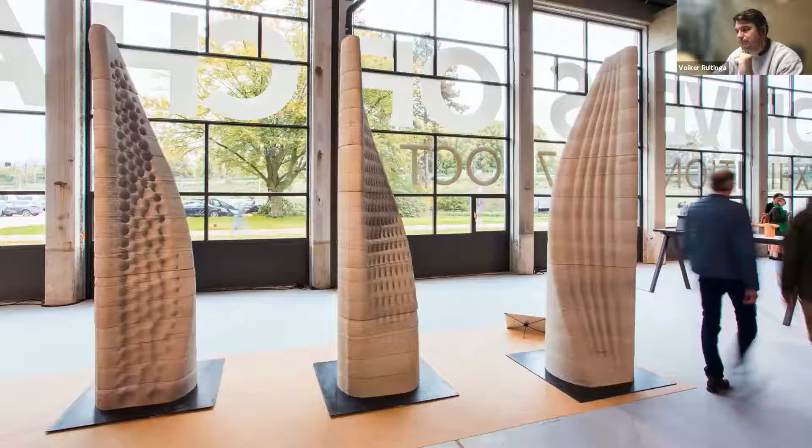But with the new technique, it hardens so fast that much more complex objects are possible. In order to show you what we can do with that, this is the sort of patterns that we can generate with this new technology. And these are all made in one go. You can see the consistency of our material that makes this pattern deviation really pleasing.

So this was a very simple triangular column. Basically every so often you ask the robot to go out 1 centimeter or so. And this one actually does that twice, and then it lays a single layer again, and then repeats the pattern offset a little bit. So it's relatively simple to make in 3D modeling. And if you have a constant supply of material like this, it's really easy to manufacture as well.

So you can see the column. This one we made on a Friday afternoon for fun because we wanted to make a column, see what that would look like. This stands over 2 meters tall, and the print time was just about an hour.

So in relation to what Amy was explaining about plastic printing, one of the key advantages here is just the speed at which we're able to make large objects. So within approximately an hour, we're able to make this column.

Our design philosophy now is what we're good at as a startup is to avoid problems of, for example, the laws we have to adhere to in terms of construction, which obviously don't exist in concrete printing yet. So what we do is we print the formwork, and then we insert rebar and we pour traditional concrete, which calms the nerves of the constructors that have to be involved in these projects, because they can use the mathematics of the existing concrete to calculate what strength these beams have to hold. And we are actually just printing the formwork.

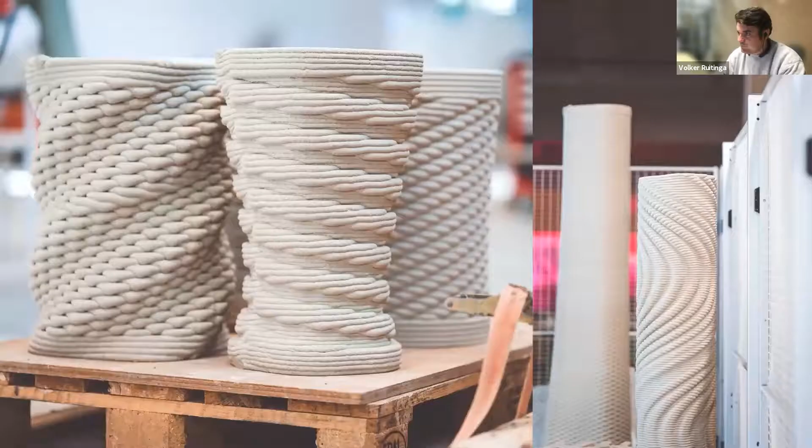In the near future, the compressive strength of our concrete, which is relatively very high because the cement content is very high, can be used as well in the calculations. But for now, we avoid the problem by basically printing the formwork, which has the added benefit of being sustainable in the sense that we don't have to use traditional formwork anymore. And there's a lot of waste in formwork right now. So we avoid that point by making custom objects that are optimized in terms of form and aesthetically very, very pleasing. So that's our focus inside the concrete printing industry as well.

You have the large scale printing of buildings, for example, and then you have the more architectural design type applications. That's what we're focusing on now, because I think that it is making the best use of robots and additive manufacturing and the advantages of form freedom.

So here are some more examples of just simple patterns that we can generate with the same parametric design.

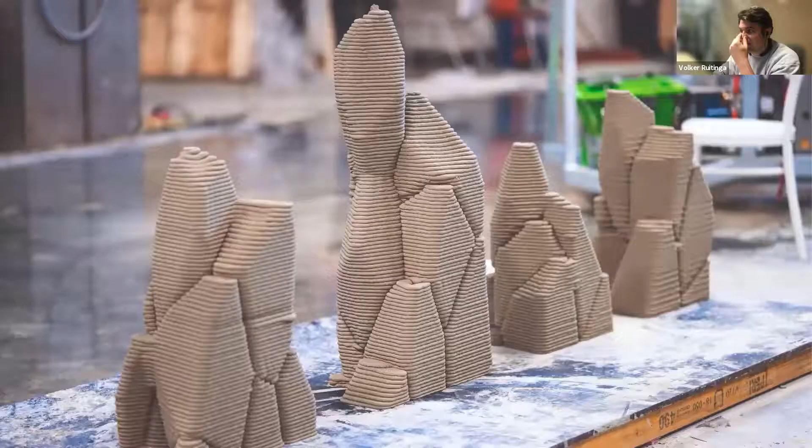Here's a project we're doing with the European Space Agency and the Technical University of Delft, where we are printing objects for on Mars. And this pattern is similar to the wall design I showed you earlier. It's called the Voronoi pattern that optimizes for shape, but also optimizes for heat transfer. And when I first started the project with the European Space Agency for going to Mars, and TU Delft, I thought, I don't want to go to Mars because it's very far away in my mind. But immediately we had lessons learned of this heat distribution that we can do by form optimization.

And we immediately had clients already asking to print electrical boxes for them outside, incorporating this heat distribution techniques for the railway system in the Netherlands. So there's a good cross learning in these type of projects for sure.

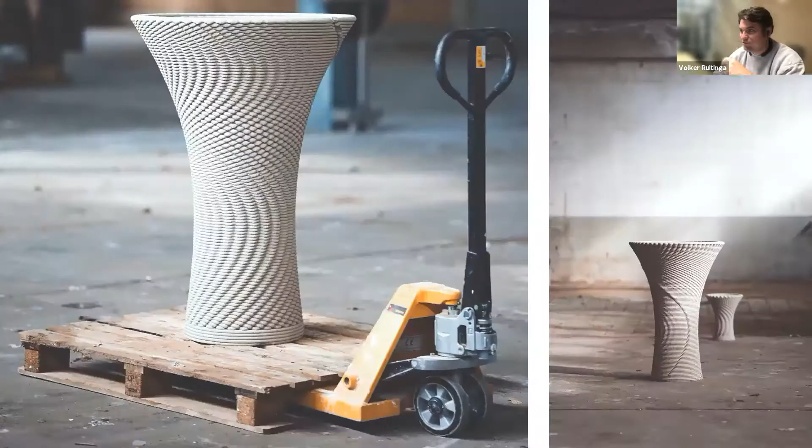I'll leave you with a final show of just the sort of aesthetic detail we can reach. This is a simple pot or bar stool or wall garden element printed in approximately 30 minutes. And you can see a beautiful pattern emerging just from this parametric design.

So to reiterate, what we do is we sell complete hardware systems in concrete printing, including the software, which we sell also. We do printing as a service and provide consultancy in the business as it is now.

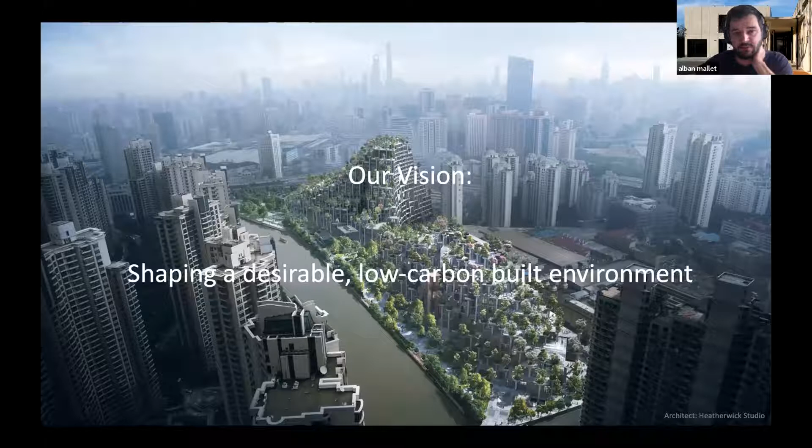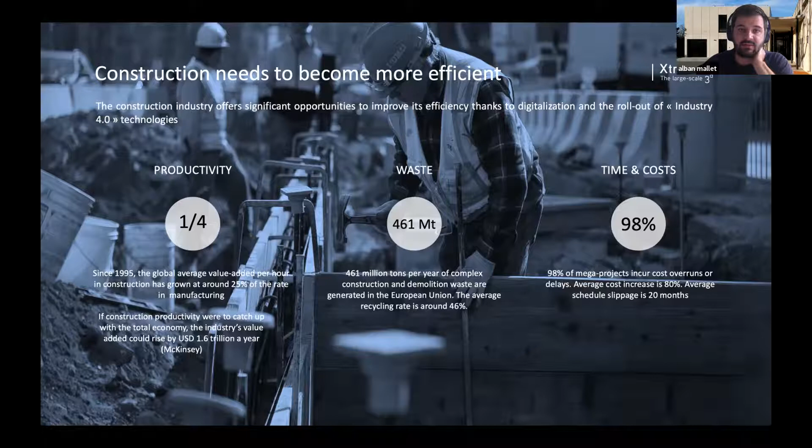Just wanted to remind what the problem in construction is and what we want to resolve: productivity, quantity of waste, and the time of the project, which are always bigger than what was expected. I think that's where 3D printing is interesting.

So our answer with 3D printing is to lower the material consumption, to do lighter structures, so you can have faster construction at lower cost, and tailor-made design. So that's the bullet points that we want to focus on, and we think that can achieve and resolve some problems of construction.

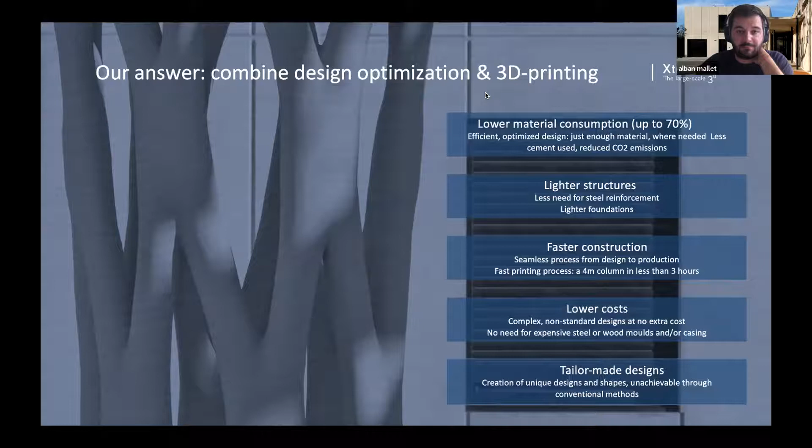What's our vision and our mission at XtreeE is to have 3D printing available all over the world. And that's where we stand.

I'm going to just explain in a few words what's our economic model, and how we imagine to go into the market. So what we have done is name it PaaS, printing as a service, because we think we are not here to just sell printers, but we are more here to help constructors and precasters have this new tool, to know how to use it, and to know what they can do with it.

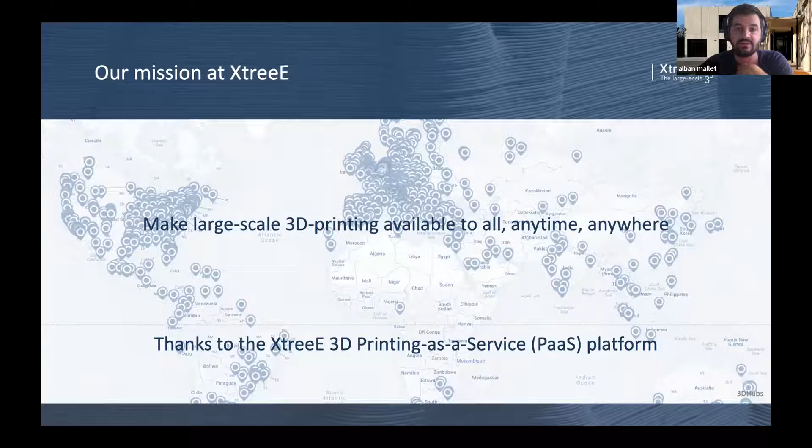So that's how we build up our solution. Our solution is, in fact, quite simple, I would say. It's a fully automatic 3D printing process from mixing to printing. Everything is automatized, because it's been more than 5 years we are working on it. We started with really simple tools, and now we build up and build up and build up.

And why we push it is because we are the first user of our own technology. So we prefer to have it as simple as possible and as automatized, because we don't like to work hard, and we prefer that machinery works better than human.

So we have developed a multi-component 3D printing system where we change the rheology online at the nozzle. It's been like 5 years we are doing this, so we have quite a knowledge on this, so that's quite interesting. We're also doing what we name mono-component 3D printing, but the difference has been well explained before, so we'll not explain more. We also are looking at multi-material 3D printing.

Today, our main material is concrete, but we are also printing plaster and clay. We also make the solution evolve to have a faster setting and to be sure that the solution will be able to go on the market, and will not take hours to print clay, for example, or plaster. So with the same machinery, we can manage to print clay, plaster, or concrete.

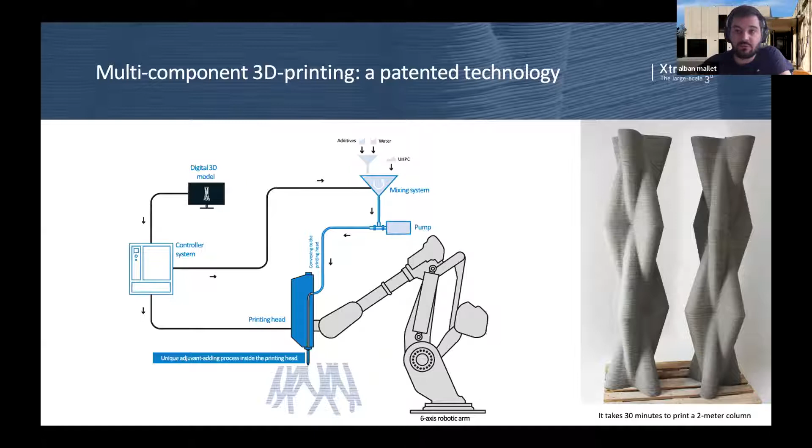That's our system based on a manipulator, which is a robot. We are using ABB robots for lots of years, but we've also developed a solution over KUKA robots, and we could go over other types of robots. There's no problem for us to go on gantries, but we feel like when you go down to price and accuracy, 6-axis robots are quite great for this kind of thing. Everything is plugged onto the robot, so the feed system and the head nozzle system.

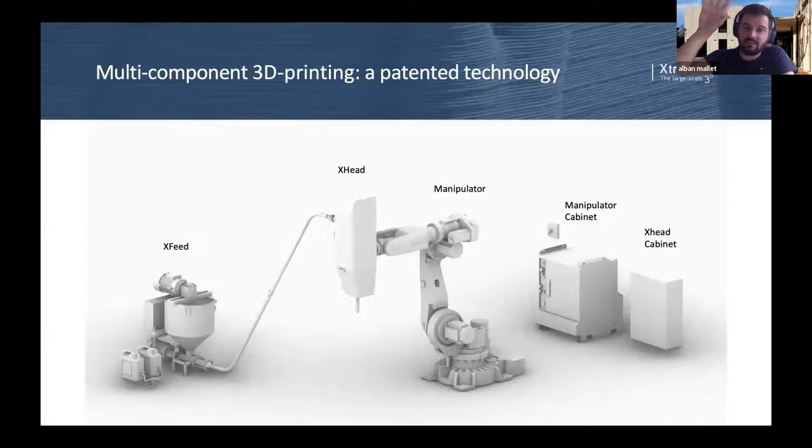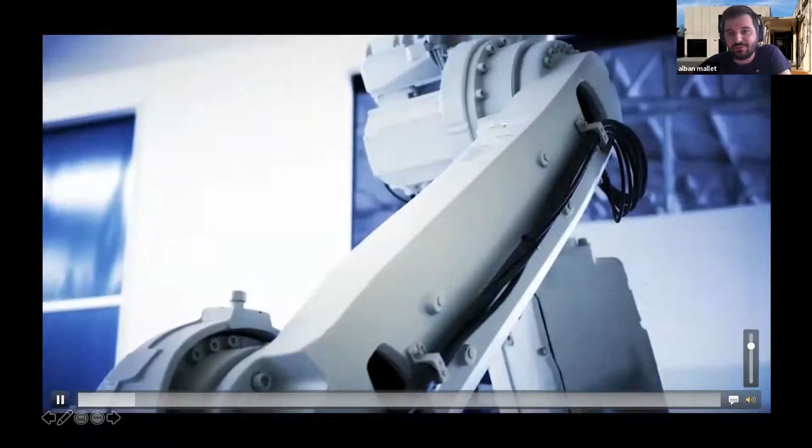I'm going to just show you a video. I don't know if it's lagging or not, but I feel like the best way to present our technology is from some partners' videos. As I explained, we are not a 3D printing company, we provide services, and we give the technology to some partners, some constructors, on Precast.

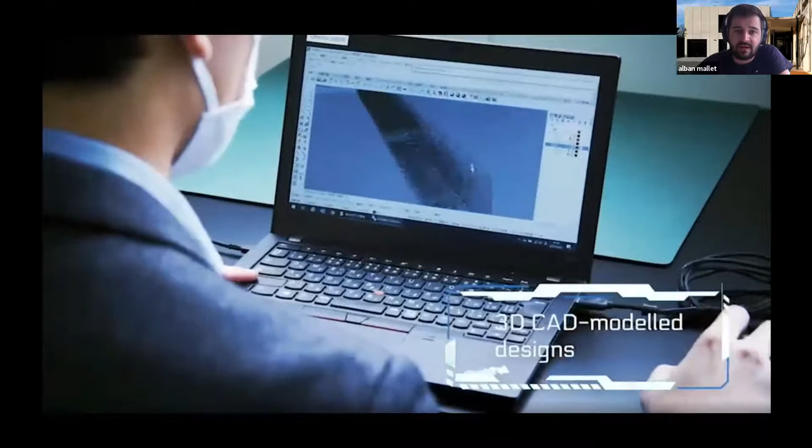So that's Kurabo. We just installed the technology in Japan, and they've used it for 5 months or so. We made them learn how to use it, and now we are helping them target the market, target new types of design, etc. But we need people like Precast or constructors to use this technology to put it in the market, and we are here to help do that.

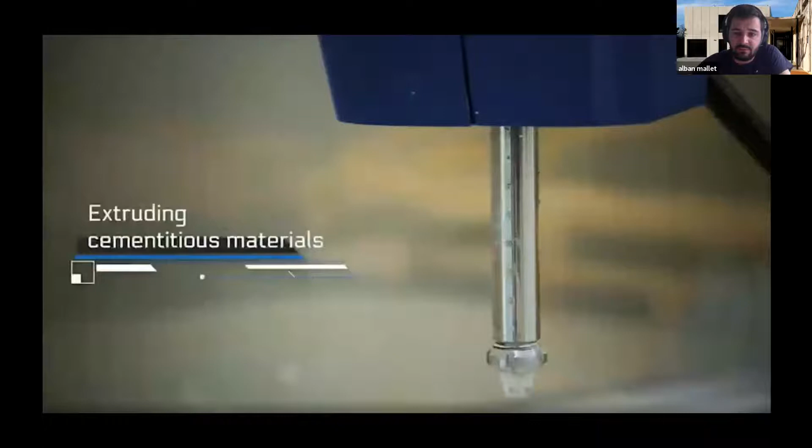I'll continue. Just to explain a little bit about the technology - I was really interested in the presentation, I don't remember the name, I'm sorry, the last presentation on plastic development, because we feel like data monitoring is one of the main concerns and main things we need to focus on.

It's been more than 3 years, we are really pushing on acquisition of data. For us, it's really important to be able to collect this data, to analyze what's happening, and also to understand and correct if there's some defect. That will help us to always have good quality, and also reassure when you need certification of your pieces and to ensure the strength of your pieces, you will have to show the data.

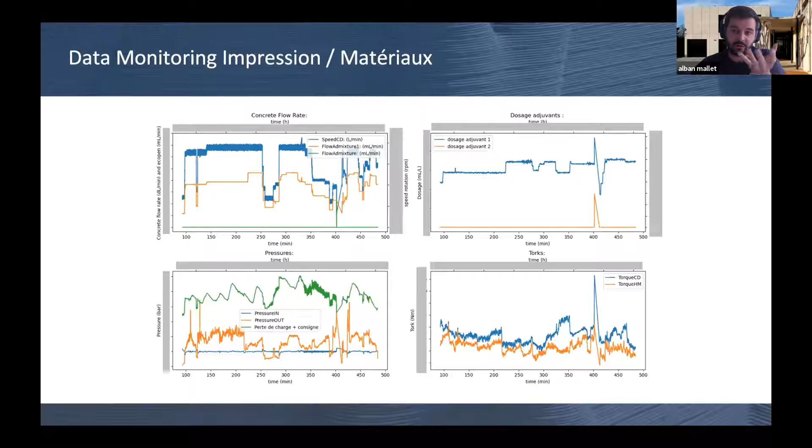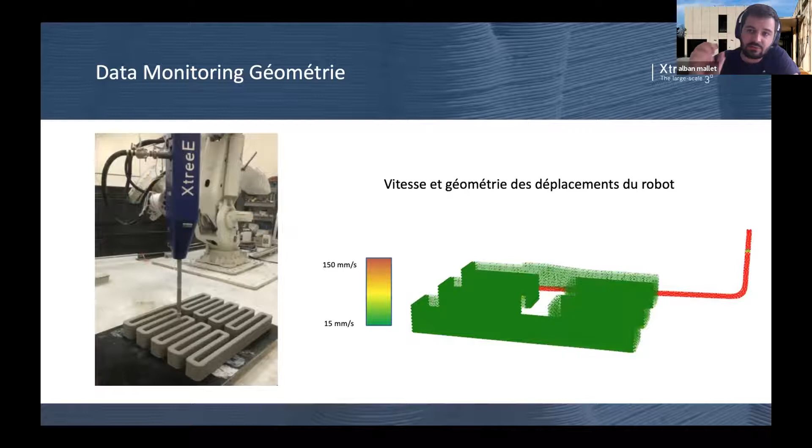When you produce, you will have a digital twin with all the characteristics. We are pushing even more than what used to be done in construction, because directly you will have a cartography of your piece where you have all the values. We also look at the real displacement of the geometry of the robot, so for the digital twin that's quite helpful - it's not what we sent, but what the robot has realized exactly.

We've also developed some tools for simulation of the geometry, because when we started, we were trained from failure learning - we learn, we print, we learn, we print. But at some extent now we are at a level where we are selling our solution to the construction industry, and they don't want to do trial and error learning - they want to have tools.

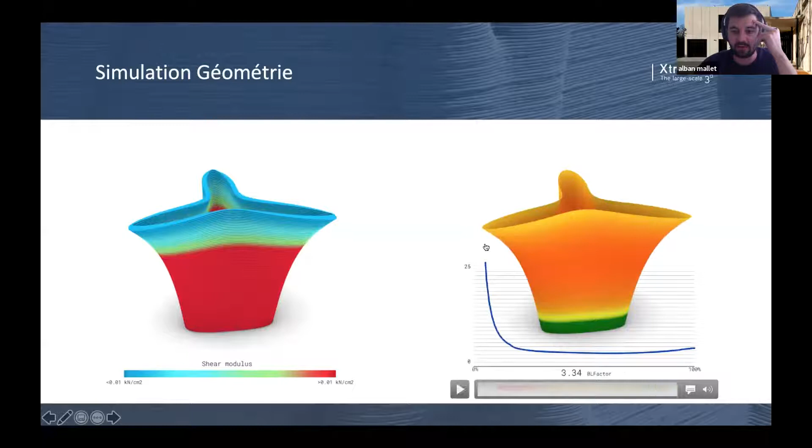So our model today for our business, and that's where I think it's really interesting for construction, is to say that we are not just going to sell printers, because if you just sell printers, it will be the same issue that everybody was concerned about.

Okay, we will all have our desktop 3D printer at home, and we will print our PCs at home, and we will repair all of our houses with those little 3D printing plastic printers.

It's the same problem in construction. If you just sell printers, nobody is going to know how to use it, which type of model to do exactly, etc. So what we do is a platform where we help all our precasters who have our technology to have the right model, to know how to print, to have the new constructive systems, to help them print well, because we have all the data, so we can analyze and push their productivity. So we are more like a tool, but not just a tool.

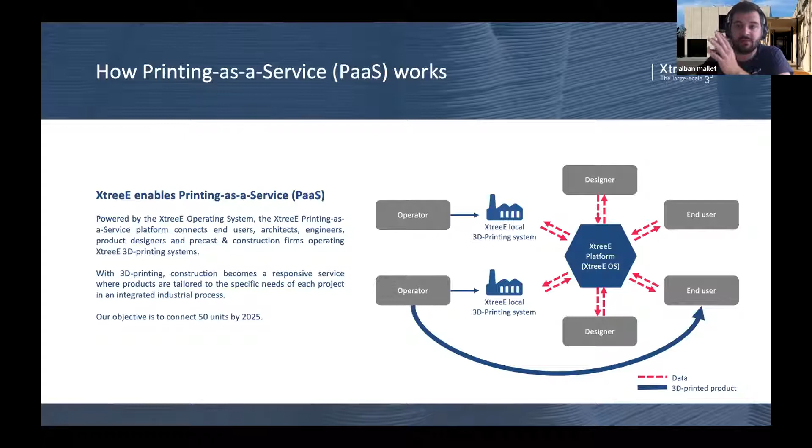We are here to help construct the market with them. And we will combine our architect with designer, with civil engineer and constructor, and together we make a good solution. That's where, when we are talking about digital construction, it stands - when you connect all those typical experts in each domain to work together to have a good result, not just say, okay, we're going to print the whole house in 3D printing, because that makes no sense. We need to push to have the good result.

I'm going to show you some projects we have done over the years, and new projects, just for you to see the broader view of what's possible to do with 3D printing in construction. So that was one of our first projects, maybe 4 years ago or something.

What we have done is print a formwork, as explained before. Why? Because it's the simplest way to go for certification inside the construction industry, because you make your calculation not on the formwork resistance, but just on the concrete which is poured inside the formwork. That's really interesting because it's fast, because you don't have to go for regulation, you are in the model.

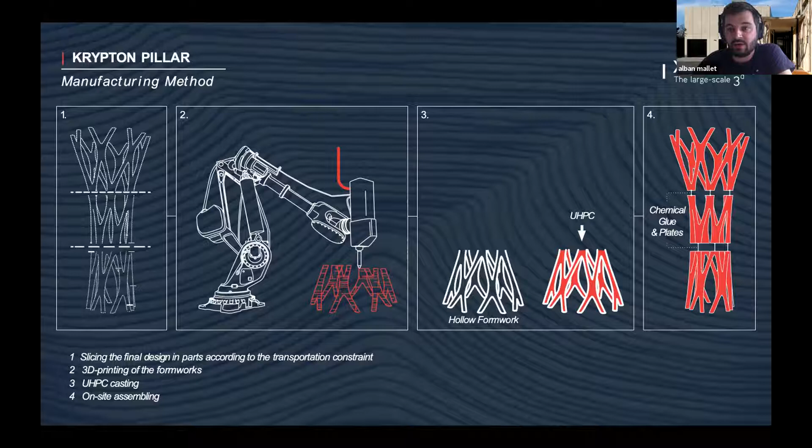So that was 4 years ago. But what we felt was, okay, that's just a start, but we need to certify the whole structure. We need to certify each gram of concrete which is used, because if you remember, our aim is to go as low as possible in carbon footprint. So that's why we need to certify each gram of concrete and cement used, because we want to lower the footprint of our construction.

So that's what we have done with Viliaprint in Reims. It's a project with Plurial Novilia. And we have made an ATEX, a certification in France, where we pushed to define all the value of the concrete when it's printed, to be sure when we are going to print, if we are in the good range, we can certify the 3D printed concrete.

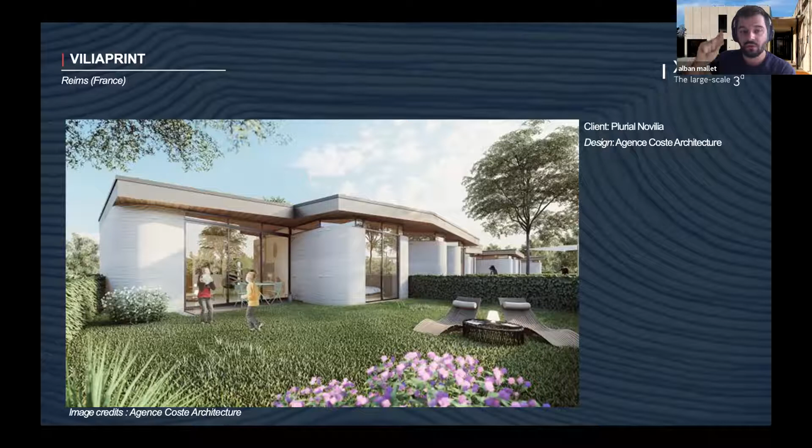So here, as you see, half of the house is 3D printed - the one in gray - and the one in white is prefab. That's because we think you don't need to put 3D printed concrete everywhere in the house, as at some point it makes no sense - it could be more expensive than standard elements. So half of the house are standard elements, prefab with really cheap expense, and the other half has been designed to adapt and connect, for example, with the windows for good insulation, with electricity, etc.

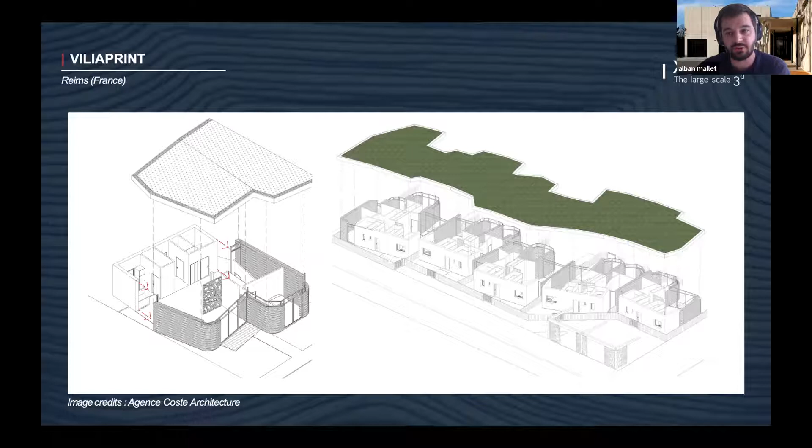We have worked in France for 2 years on those certifications, because we want to push the certification all over the world and ensure that what we are printing is part of the resistance in the house, not just for design or extra.

So it has been printed - 5 hours printed over 20 days for all the walls. After that, installation took maybe 2 or 3 days - they installed and put all the elements together. So it's like a Lego.

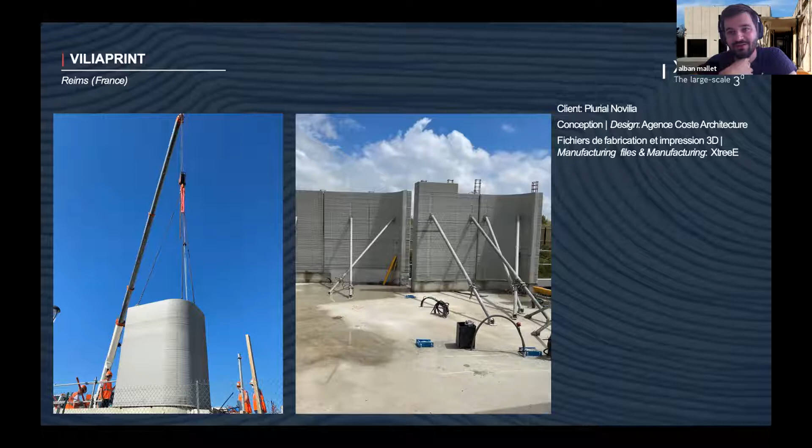And why we managed to get the certification for this one as fast as we could - because it's normal. It's like you have a brick wall, so those are considered as brick. And we pour concrete inside. You see some rebars - there are some pockets with rebars where we pour concrete. So this is like a 'maçonnerie chaînée' - I'm sorry, I don't know the translation in English, but it's like bricks and poured concrete. And that's where we have the certification.

As you can see with the technology, we are really focusing on having good quality printing, because we think nobody is going to go for a 3D printed house if it's ugly.

So we need to push for good quality control and not accept anything that isn't beautiful. That's also a whole project, but it was quite interesting to see the broad view of what 3D printing can do.

So this is the Stormwater Collector. It's not for design, it's really useful because it can be adapted to the site. We open the site, scan where we need to put the entrance and exit, and send it to the printer. We print it and ship it on site to have it installed. So it was really fast, and you can reduce manual labor, because normally they work under the floor and need to block the road. It's really complex, but now we can go much faster. It's maybe not cheaper, but it's faster and safer. And because you're not blocking the road, you won't have problems with the authorities or the people around.

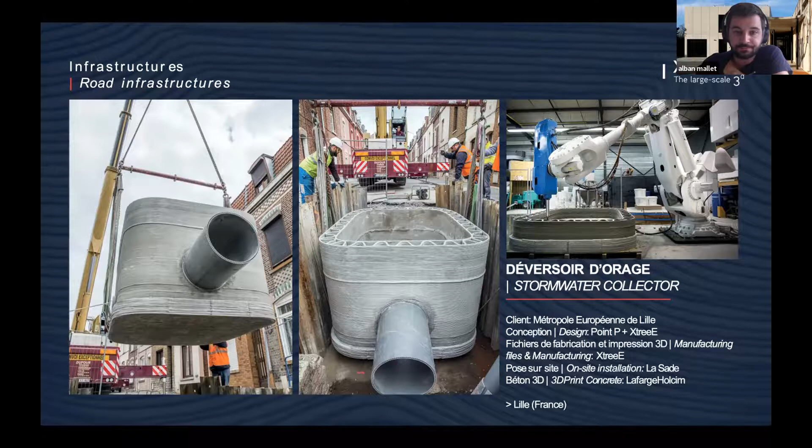Excavation mask, just to show.

Also, artificial reefs are something quite interesting we've done for a long time, and we've done a lot of them. It's interesting how topological optimization works not just for humans, but for fishes. What's great here is you don't have any regulation about the strength of what you're doing, because it's underwater. So we managed to play a lot with adapting the shape to the needs of the fishes, or the needs of the structure, the topology, or humans. It could be anything. It's a good example, and it's working quite well.

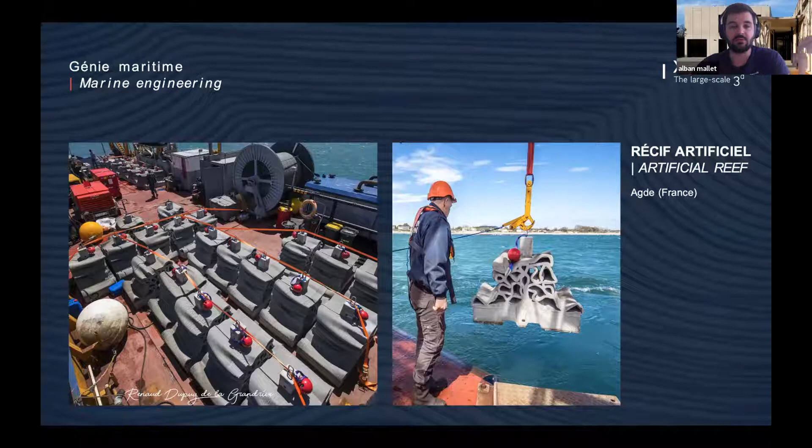We have a lot of colonization. We're working with different companies like Egis, CETEC, civil marine engineering companies. We also manage to go for large production, because printing just one object isn't really complex, but when you start printing for mass production, that's where you need to tackle the repeatability of your process, the productivity, and look at the numbers at the end of the project to see if you're good enough in productivity so the price is good. That's why we try to go from R&D research to construction and productivity for construction.

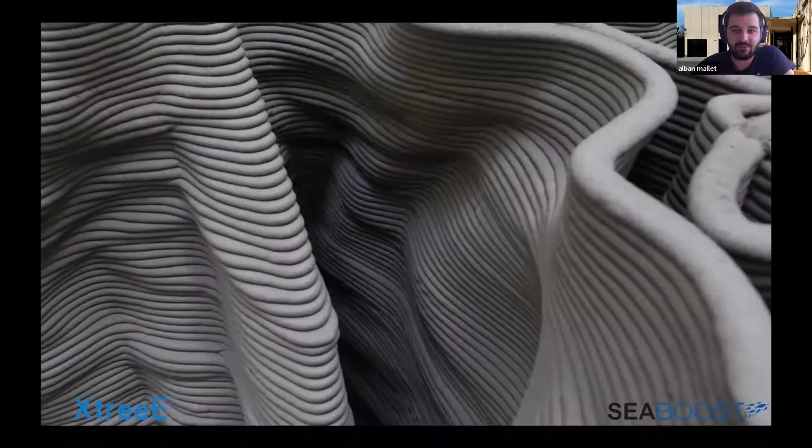I'm going to show you some video. That was quite a long time ago, because all the floor is clean, everything is clean. Now it doesn't look the same, because when you work with concrete you make a lot of mess when you have a problem. But you can have nice videos of how it's done, what it looks like.

As I said, we're not doing just artificial reefs here. We combine artificial reefs with anchors for boats, so you have an anchor which floats on top. Boats don't need to put anchors in the water because it's a protected area and we don't want to destroy the marine floor. We managed to adapt this, and fishes start to recolonize really fast. Concrete is great because algae can go inside the concrete and really grow on it, and you get lots of fish after fish.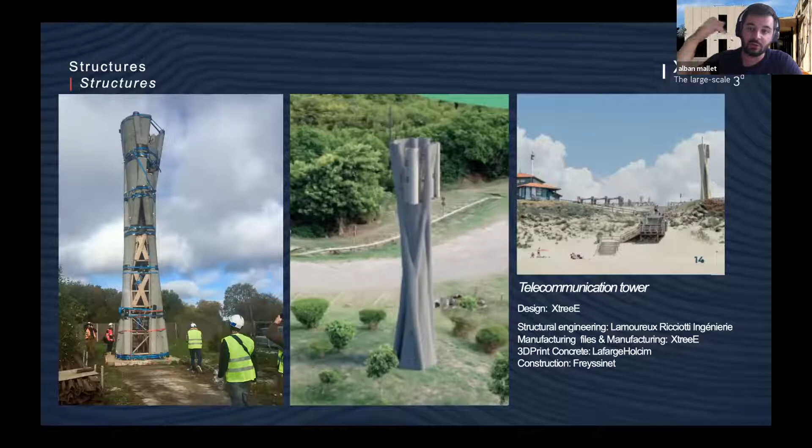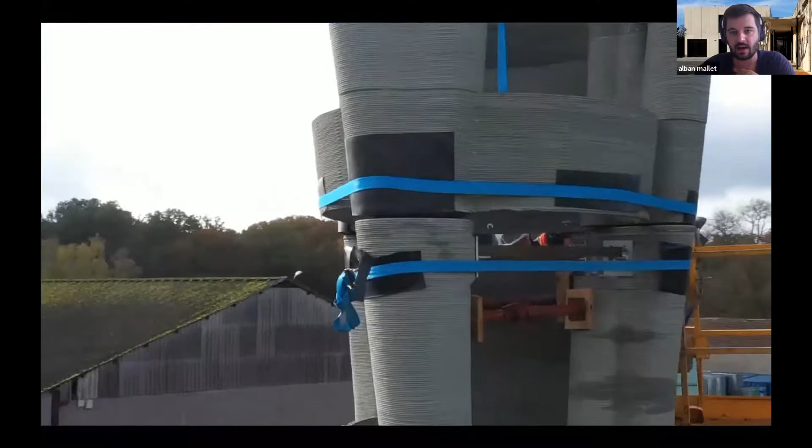I'm going to show you a little video here of one of our partners, Artifact. As you see, we never do projects by ourselves. We always need to create an ecosystem between civil engineers, constructors, architects, and we're here to combine all those people together to make them work on one type of element and think of the best elements they can make. That's the installation for the prototype to test it, and after to pre-stress those elements to see how strong they can go. That's one of the videos.

I'll go just for furniture, but really fast, to see the quality we can achieve. With the same machinery, we can do furniture for fine things and also a bridge or a post for structure.

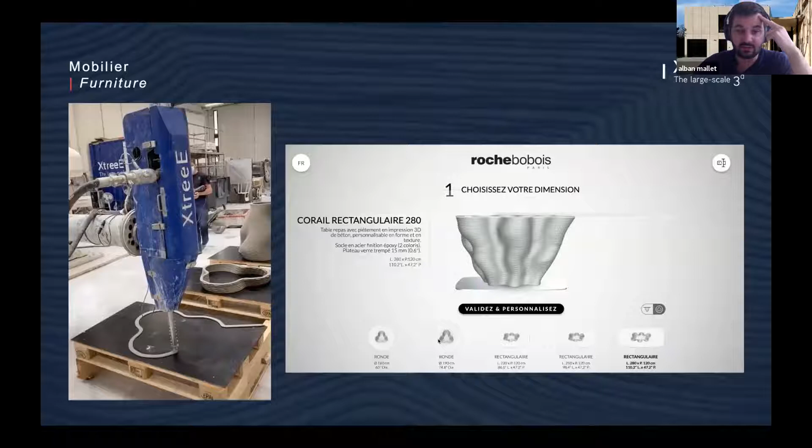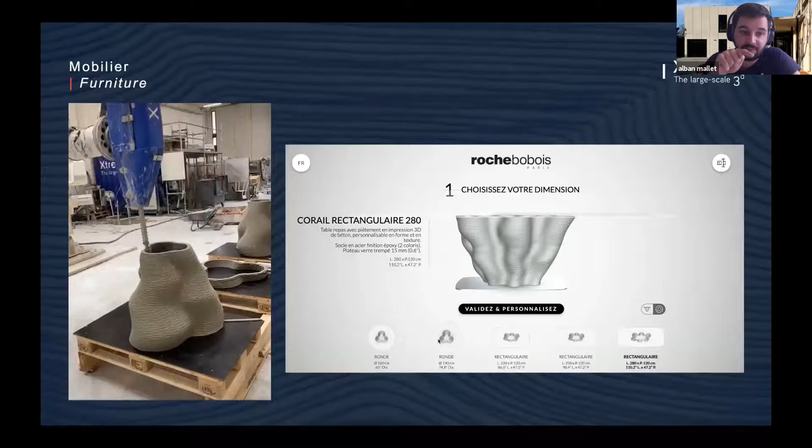This is a project we are doing with Roche Bobois. As you can see, this is the print, and the quality of the print is really fine, really great. When you are working on this type of quality, you know it's going to be easy to make a bridge or to make something else, because they really regard each type of defect. You can't have any defect on this type of table.

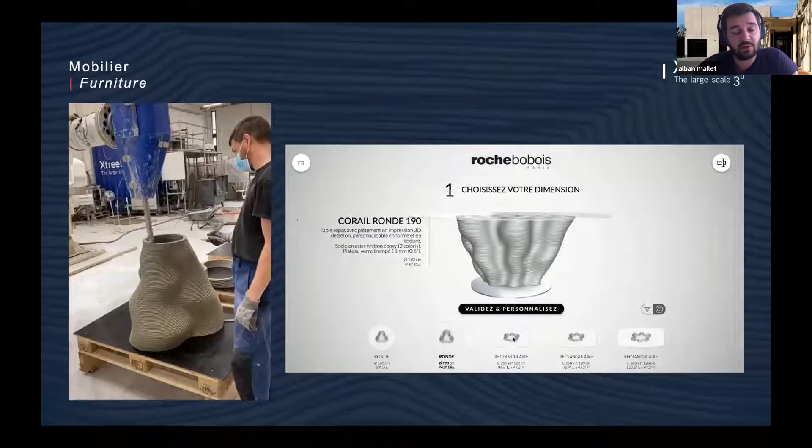We have worked with them to do something we are going to push, which is an easy design, an easy catalog of design that you can manage online to change. So you put your numbers if you want 5 meters, 4 meters, where you need to put your anchor, etc. This is for a table, but you can imagine it for a house, for a bridge, for anything. And what we receive from their side is just some numbers.

We put the numbers in the machine and the machine is going to print. So today we are printing all the elements of the table, and the furniture elements are different. It's not complex for us to do different elements because it's a robot and it's fully automatized.

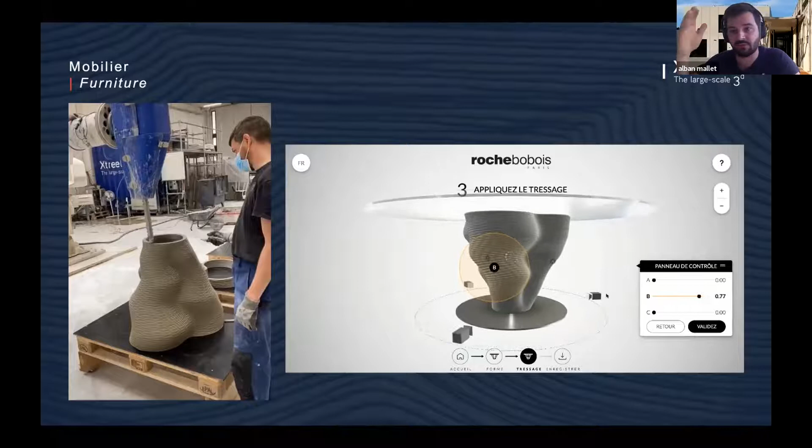This is the last project I want to talk about. It's a 40-meter long bridge where we're going to have the certification over the concrete. So the concrete is going to be the one making the resistance of the bridge. We are not going to do anything else, and we're going to pre-stress the concrete with cable inside. So those are going to be different elements.

We print vertically, which we will print here or at a partner facility. And after, they will assemble on site all the elements, put a cable, push it, and you will have enough strength to have the resistance of the bridge.

I have a little 3D print model here. This is how it looks like inside the model, so it's fully hollow. And we are starting also to do the life cycle analysis, because as I said in the first slide, our goal is to reduce the footprint of the construction.

We are starting the life cycle analysis and we have really, really nice results, about CO2 emissions. We're going to resolve and have less CO2 emission, but also help the workers, reduce the difficulty for workers, improve the quality of the bridge because it's prefab. I think the last presentation explained well also why we focus on prefab: because we need good quality, good security, control of the environment, control of the data.

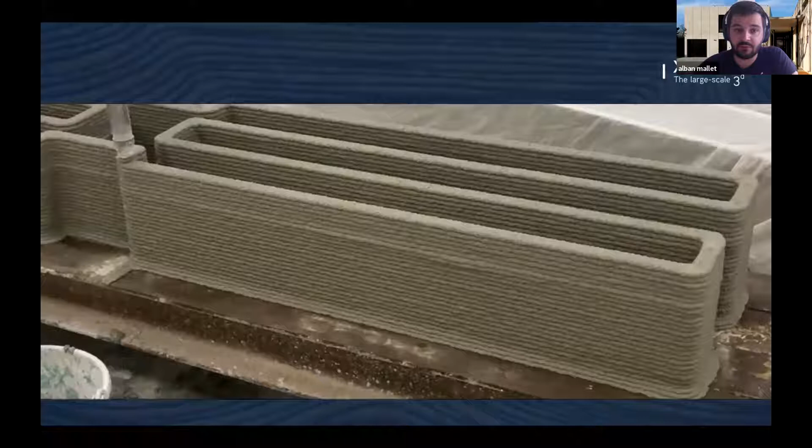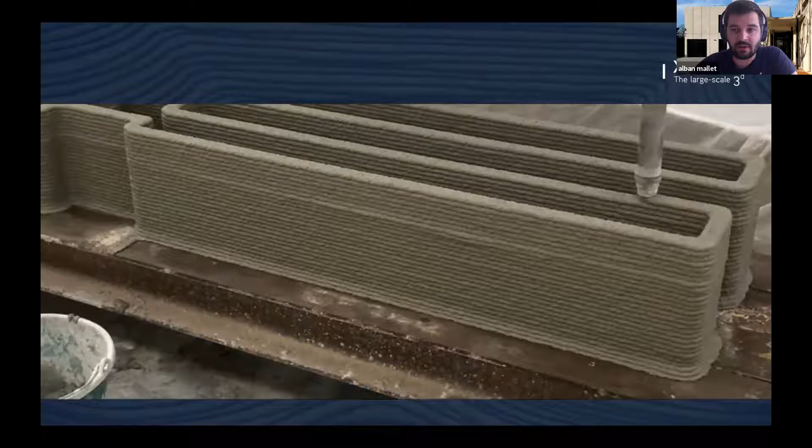We are also working on material, and this is the new material we have developed. It's always big components, but we are starting to have aggregate, and aggregate lowers our footprint emission because we put less cement with aggregate, and we have the same strength with or without it, because we managed to get the good granularity.

We are working with partner teams on this project, also working with Freyssinet, working with Quadric. So it's always a combination of partners, because we are working on the ecosystem, and every part of construction, every person in the construction, needs to play their part. We are here to connect them and to make them think about how we can build tomorrow.

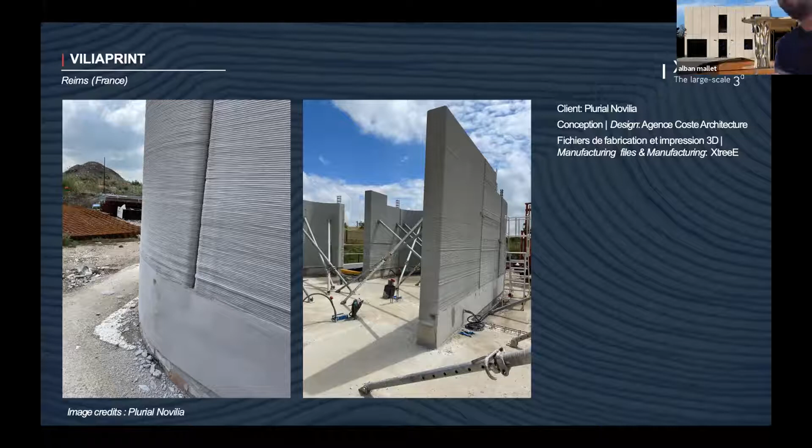Can we see? No, we can't, sorry, because there is the background.

We are thinking about the joint, and if you think about it, it's okay, in fact it's not a problem. Most of the time it's better not to hide them, better to assume there is a joint, but that's more about aesthetics and architecture. It shows how it was printed and designed. Architects wanting to see the joint explains more about the structure, how it's working. So we put the joint, but in fact the joint is just a connection between the two prints, one going over the other and inside.

I agree, but if you look behind you, you have a joint in the image, and it looks really good because it looks really straight and precise. That's something architects do care about, I think, joints in construction. So you're saying the joints here are not beautiful?

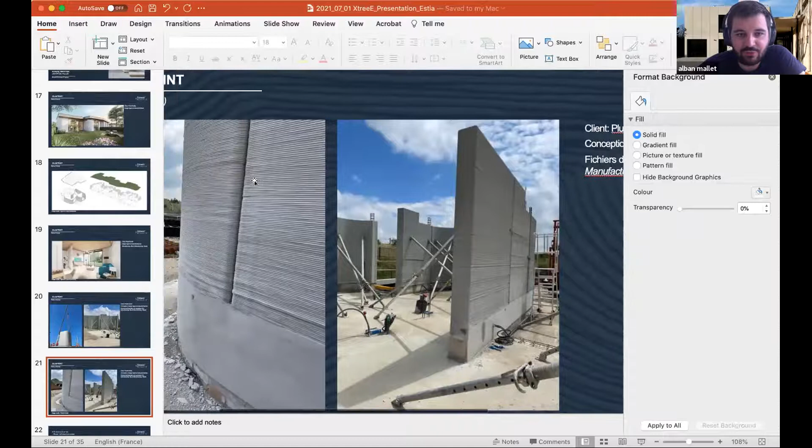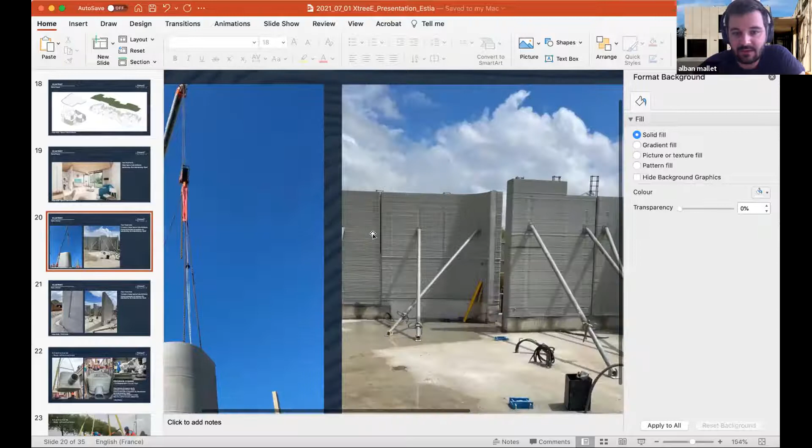Well, yeah, really it's something we need to push, maybe they are not clean enough, maybe that's something we need to push. I think we are at the start of also assuming some aspects of 3D printing. If someone doesn't want the joint, it's really simple to put some coating on it just to hide it. But at some point, I prefer not to hide it, I prefer to show what the real structure is, how it works, how they are connected to each other. I think that's the best way to do it, but after, it's more about discussion with architects, etc. Clear.

Okay, thank you. Do we have another question? We have time because Alban was quite fast, so we have time for questions. I was going to say it was too long, so it's okay. No, it's okay.

In some of the examples you showed us, there was some rebar inside. Maybe it's this one, yes. So was it after the 3D printing that you put the rebar inside, or was it printed around the rebar? It was put after, so it was in the design. We left the space to put the rebar inside directly in the design. We have done other projects where we printed around spaces and connected the rebar after.

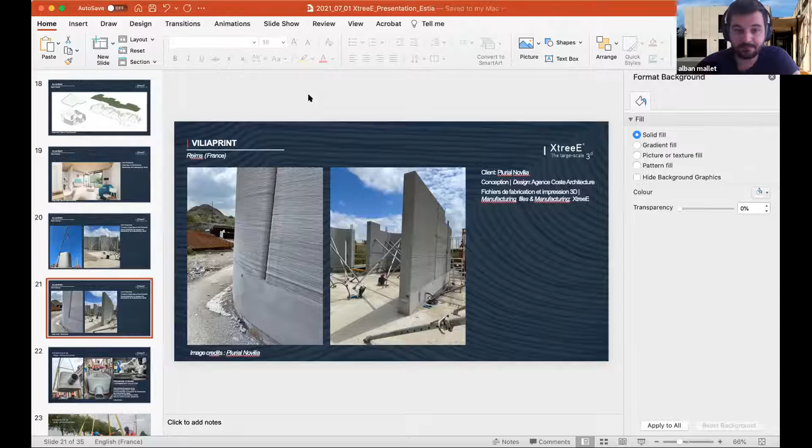Okay, thank you. Maybe another question from the audience. I wanted to show a connection as an example. Okay.

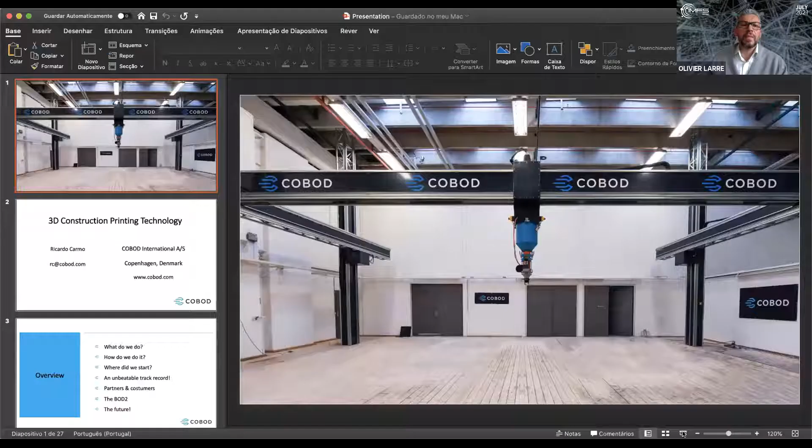Yes, now you should be able to see my screen. First of all, good afternoon, good morning, or good evening, depending on where you're seeing us from. Also a big thanks to the Center for Rapid and Sustainable Product Development in Portugal for inviting me to give this presentation during the International Manufacturing Forum series. And also thank you, Olivier, for the intro. Probably I should start going on. So my name is Ricardo Carmo, and as you said, I'm here on behalf of Cobod International. We're based in Copenhagen, Denmark, and we do 3D construction printers.

I'm going to be talking a little bit about the technology. If you need to get in touch with me afterwards for some reason, or if you have any questions that I haven't addressed here in the end, my email is rc@cobod.com.

So what I'm going to talk about is, first of all, what is it that we do and how do we do so. Then I'm going to go a little bit into our history, where did we start our journey along the way. I'm also going to talk about our partners and our customers and the projects that both they have done and that we have done at Cobod ourselves. I'm also going to talk about the BOD2, which is our printer, and perhaps give you a little glimpse into the future more towards the end.

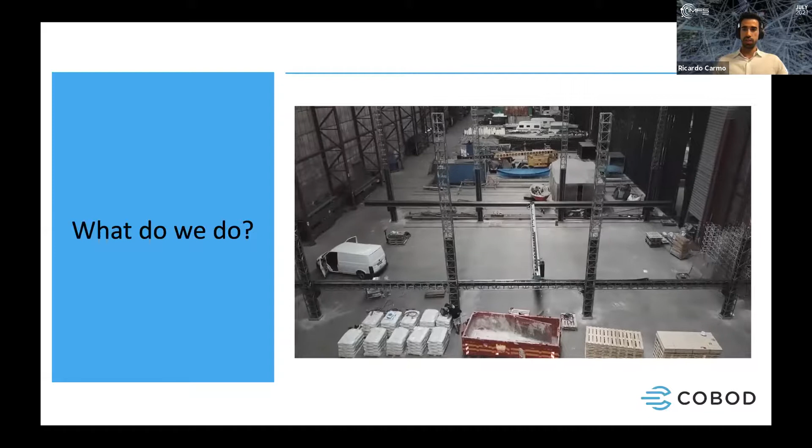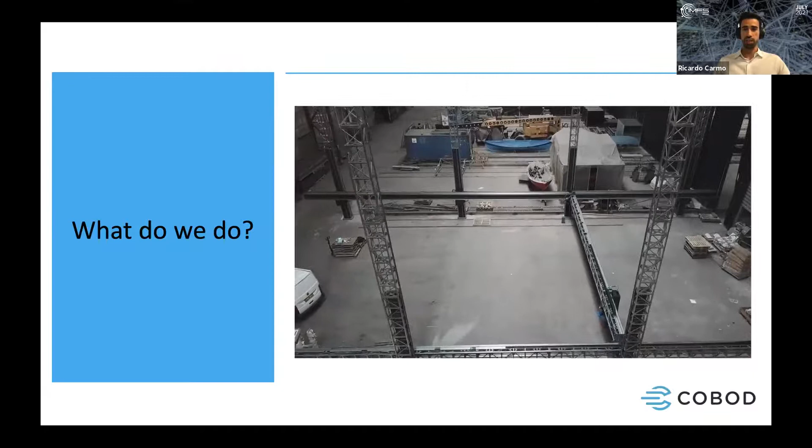What is it that we do? We make 3D printers for buildings. Here you can see one of them. At the time, it was the largest construction printer in the world. It was sent off to the Middle East. It's roughly 12 meters wide, about 27 meters long, if I'm not mistaken, and about 10 meters in height. So it's a pretty big monster, this one.

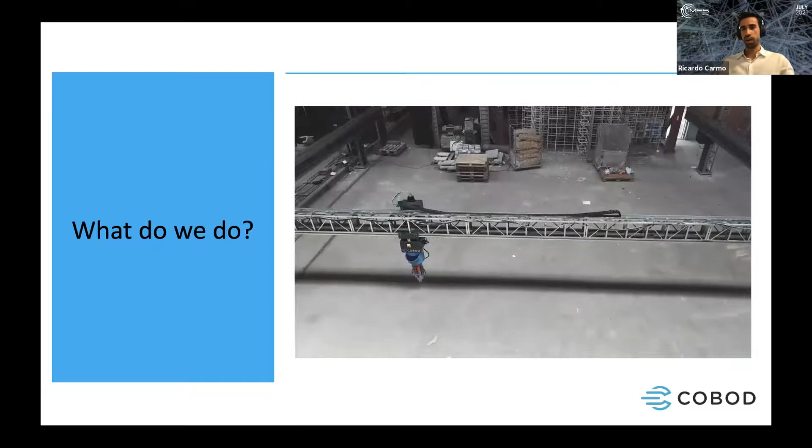You can see that we basically have 3 axes: one where the robot is, where the nozzle is running - that's the X. We have the Y for the length, and then we have the height, up and down. This one is pretty big, you can compare it to the van. And obviously we have smaller ones as well, but this was just to give you an overview of what it looks like.

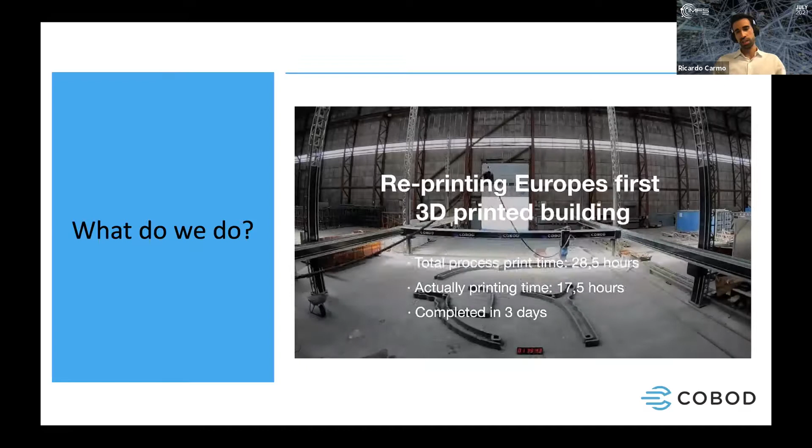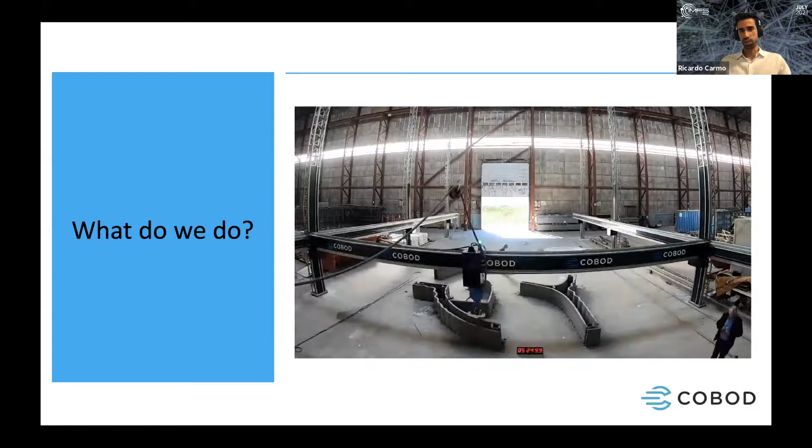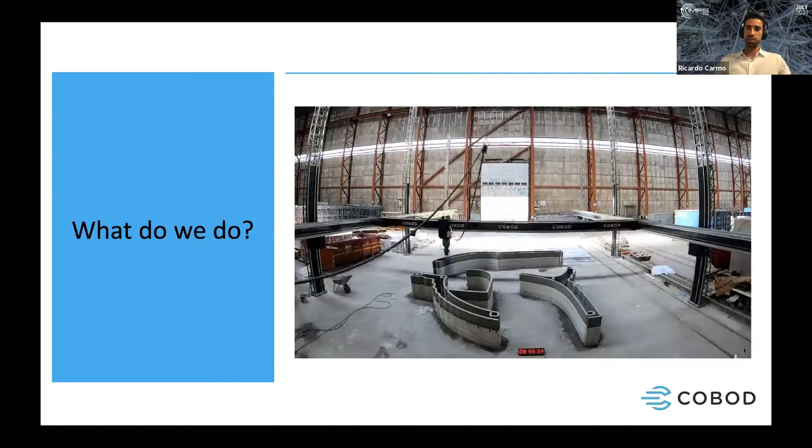Let's see, this is the printer in action. It's actually printing the first building that was ever 3D printed in Europe. This is a rebuild of such a building 2 years later. On this, you can see the same printer, only you can also see the hose that's feeding concrete into the nozzle. You can also see a whole lot of people because this print was actually done by students, so they were doing all sorts of measurements and learning everything they could.

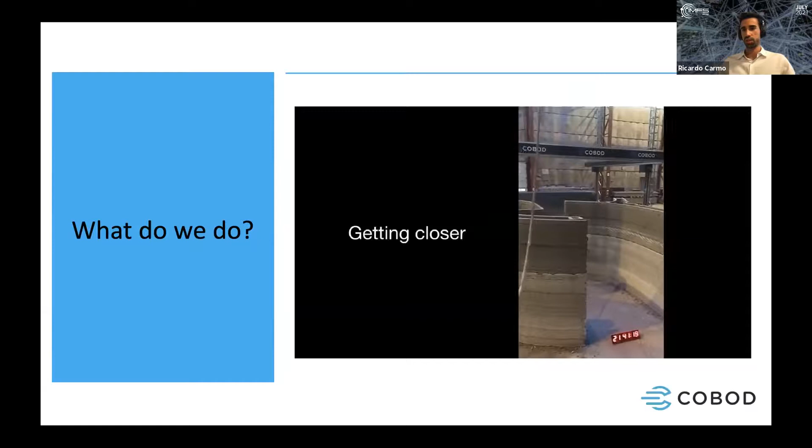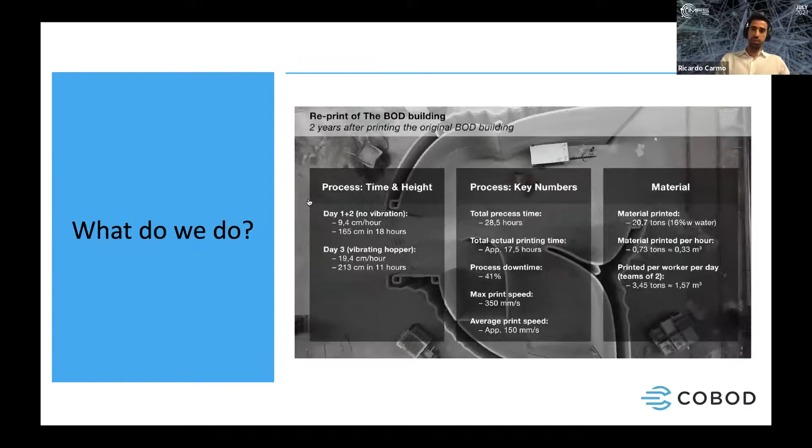The printer actually only needs a team of 2 to run it - one person controlling the printer itself, and the second one taking care of the material, making sure it doesn't run out of concrete. You can see the end of it, and this is what it looks like from the top. It's actually 20 tons of material in under 30 hours, so it's quite a lot of concrete as well.

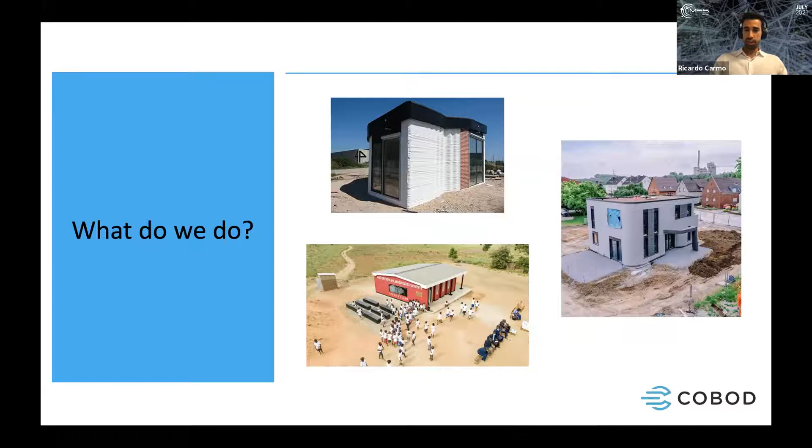What is it that people or us print? Well, it can go pretty much from anything. On the top left, we have this prototype building that we made first. On the lower left, it's a school in Malawi that was just inaugurated either 2 weeks ago or last week. And on the right side, you can see an actual livable house in Germany, which is going to be inaugurated still within this month. These are all real printed buildings.

Now, how is it that we do it? There are basically two ways to go at it. Either you have a robotic arm 3D printer in which you have a nozzle attached as a tool, and you still have the hose where the mixture comes through, or you have a gantry type system. This is our sort of printer, where we have the 3 axes I mentioned before, and the nozzle just runs on that.

We also don't really need so much path planning. Of course, we need a conversion from the building information modeling to a set of instructions that the printer can run, but that's about it.

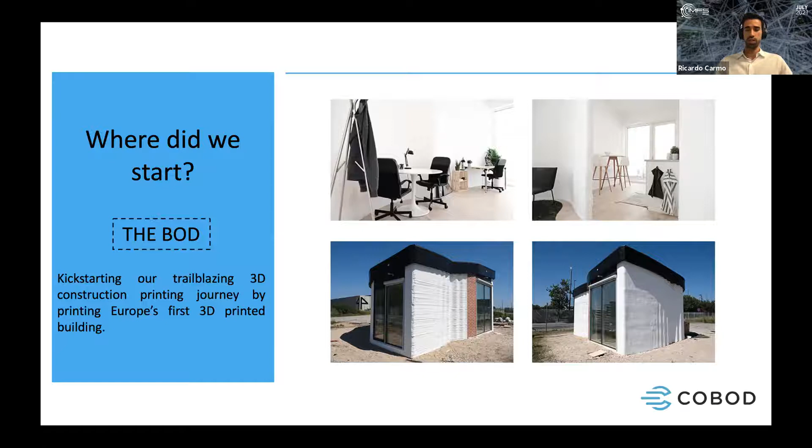We've also done quite a lot of other first 3D prints. Again, this was 2017, this little building called the BOD—it was the first in Europe. In 2019, they made the first 3D printed two-story building. This is in Belgium, done by Kamp C.

Still in 2019, we've done a couple of different things. The first 3D printed villa, that was in the United Arab Emirates. And we've also made the first 3D printed windmill tower base. This is a partnership we have with General Electrics and also with Lafarge—a long-term one, and I'll show a few more pictures and talk a bit more about it.

In 2020, PERI in Germany did the first 3D printed three-story building in Europe using our printer, and they also did the first 3D printed residential building in Germany.

Still in 2020—I've shown a picture of this—the school they printed in Malawi, but 14 Trees also did the first 3D printed buildings there for housing.

In India, they did the first 3D printed two-story building, by L&T, which is the biggest construction company in India. And guys from Printed Farms in Florida did the first 3D printed building there, and they're actually now holding a workshop on 3D construction printing.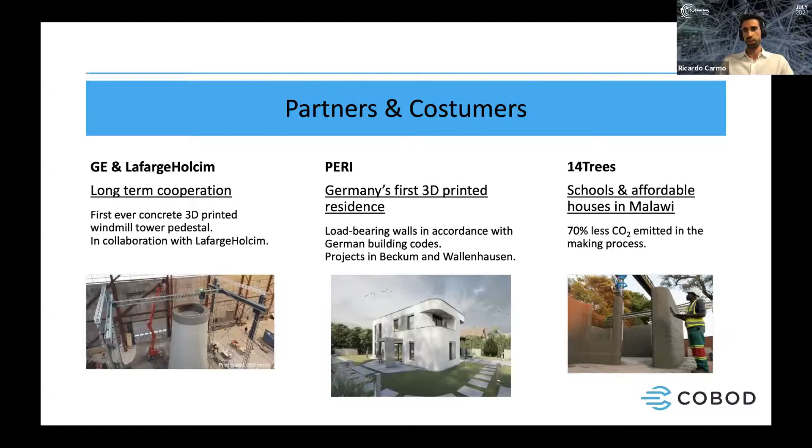L&T, the largest construction company in India, printed a two-story house using a locally sourced real concrete mix, so again something done in place. The same with the printed farms—they built this, I think it was meant for storage. In Florida, as you might know, there are a lot of hurricanes, and the building had to withstand very harsh conditions, and that was not a problem.

And lastly, we also have precast customers. This is something we didn't really anticipate in the beginning, but we've actually got this—PERI sold it to Röser in Germany, and we've also sold another for precast. So people are making concrete prints and then shipping them off with our printer, which is a rather different market, I'd say. I think Alban from XtreeE talked a little bit about this too, that they made their prints and then shipped them off. But it seems they're also making big prints, not only roughly medium-sized.

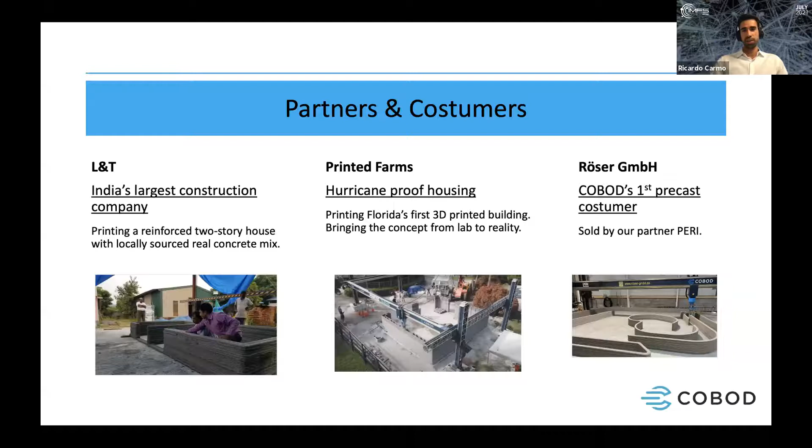Our partners, as you might have noticed, are scattered pretty much all over the world—the States, a little bit in Africa, we have printers in Germany, the Middle East, and also in Asia. The idea is that 3D printing is getting everywhere. I think what's interesting is that you don't see the 3D printers going only to developed countries—you see them going regardless of that, for numerous projects. So it's not like only rich countries are buying it; it's a little bit of everything.

Okay, now to the printer itself. This is only the second generation printer—the first was the one that printed that tiny white building called the Bod. It's very reliable and durable, and it's actually the best-selling construction printer so far. I think there are a few points on why it's successful. The first is that it's modular, so you can have a printer that's rather small, say 5 meters by 5 meters by 2 or 3 height. We have a couple at DTU, the Danish Technical University, with a smaller one, and then you can have a giant printer like PERI's if you want to make a 3-story building. Of course, it all comes down to your needs.

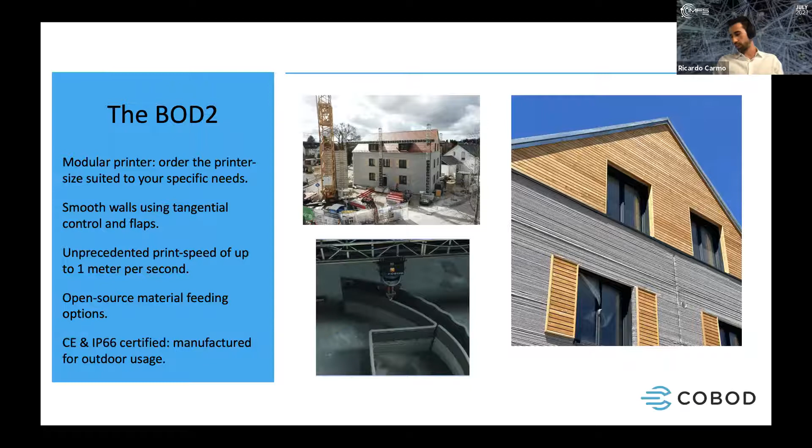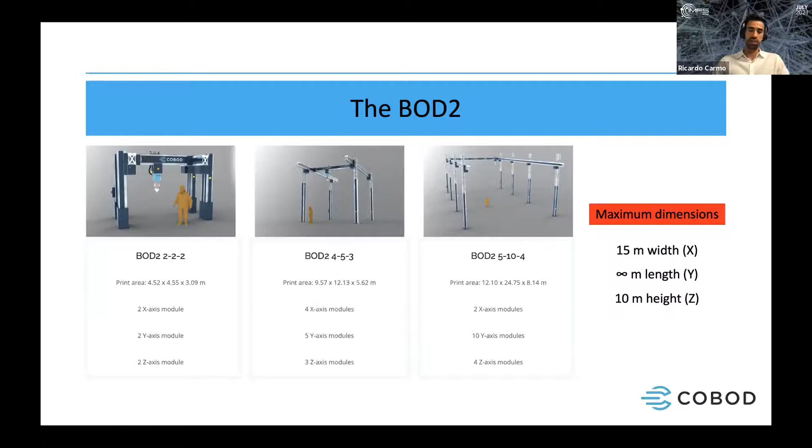Okay, so as I've said, there are a number of sizes. You can have a small one, medium, large, and larger just by adding a few modules. Right now we have a few limitations, so we cannot go beyond 15 meters wide, but we can go infinite on the Y. So you can basically print an infinite row of houses, that's not a problem. We also have a limitation of 10 meters on the height, but we are working on expanding both, that's always a goal.

Now to the system itself. I've been talking about this printer - is it too complex? How much stuff is there in it? How many hidden components are there? It's actually not so complex.

The printer itself has 3 sets of modules, one for each of the axes. You can see on the lower picture, there's one module of each, and there's also the nozzle and the hose that's feeding concrete mix into the nozzle. Then you need obviously a controller - this is something that's gonna be running the encoders and making sure the step motors actually go where they should be.

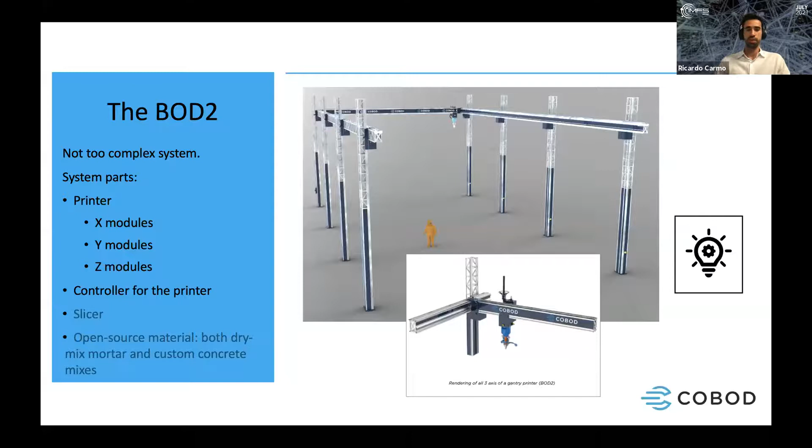And then we have a slicer. The slicer is this magic little program that transforms the building information modeling from architects and engineers into something that's actually able to control the printer. In our case, this is G code - exactly the same language that the normal 3D printers you have in your office, printing small figurines or prototypes, use. It's exactly the same thing.

We also have something I think is quite nice - a set of cameras. So the person controlling the printer can actually be having a beer in a bar and looking at the live feed. And now to the material.

As I've said, people can use dry mix mortar or their own custom concrete mixes. Once you have something that's in sort of the right range of fluidity - I'm not sure that's the word - so that's actually printable, you just have to pump it up to the nozzle, and then it goes printing on.

We've been discussing quite a lot of benefits from having construction printers, either by using robots or by using these gantry type 3D printers, and I think there are a few key points. Automation comes together with speed. There's less need for scarce skilled workforce, which is obviously costly - labor is costly, especially in the Nordic countries here. Automation also allows for repeatability, which people, no matter how good they are, cannot repeat the same exact thing twice. Obviously less accidents too, but then we go to speed, which always comes associated with using automation.

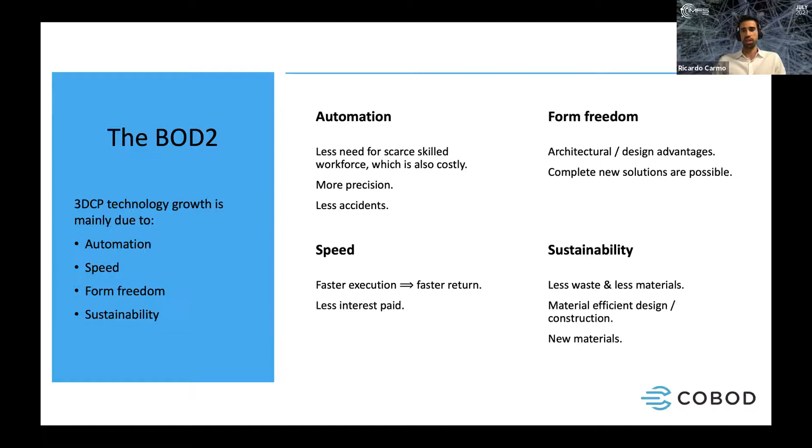And then we come to sustainability, which is a topic on its own. First of all, there's less waste - now you only need to print wherever you need, you don't need to cut elements so they fit the design. There's also often not so much need for reinforcement material.

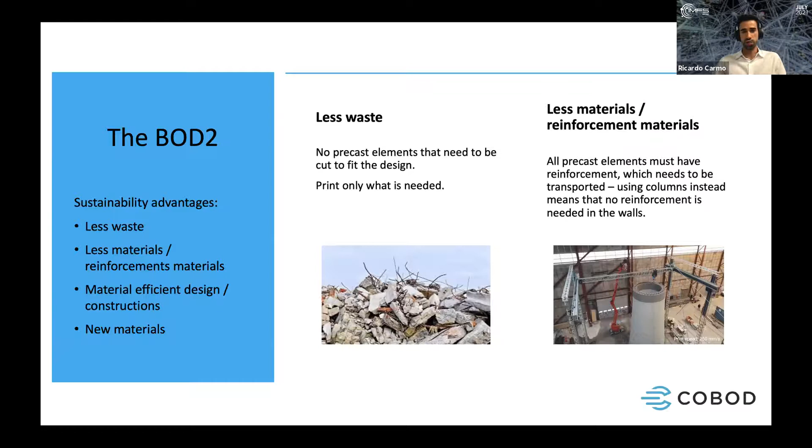In precast, first of all, you need to transport the precast, and we've talked about having rebar and all that. If we are printing, in the case of the GE tower, we have a sort of rebar that's a ring, placed every few layers. But on the normal prints of houses, the only thing we have is wall binders. There's no rebar coming up while we're printing - there's the wall binders, and that's it.

And then we go to new materials. The idea is that we're printing with concrete - concrete has very good properties for construction, but we can actually use other things in it. For the bod building, that first white one you saw, it was actually almost a quarter made of recycled roof tiles. This opens a lot more new possibilities. Of course, the material has to be printable, but apart from that, it shouldn't be so much of a problem.

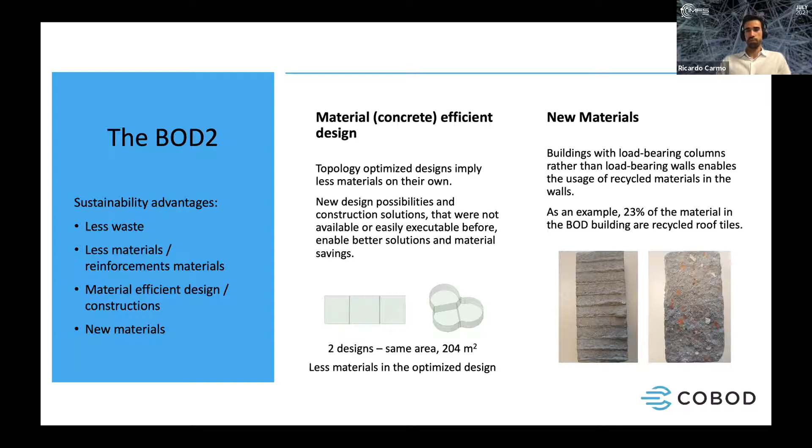About the future: speed is always an issue, and again, we're always striving to make it better.

On the BOD building, the one made in 2017 was reprinted later. That was the video I mentioned at the beginning, with a lot of students in it. And just for the fact that we did it again 2 years later, we did it 20 times faster. That's a pretty big leap.

Also on this right side, you can see the printing of a house, and it took 3.5 hours after we got the drawings till the moment we printed the first meter of building. Here you can see the wall binders aren't visible, but basically giant staples bind this outer structure of the walls.

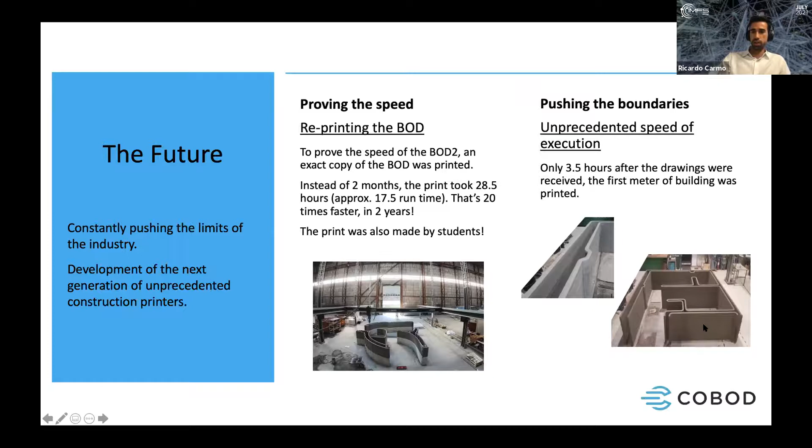For the GE tower, we did this exact same print a year later, and we 3D printed 175 tons of concrete with 8 tons of reinforcement in 3 days and 4 hours. I want you to take a second and consider that 175 tons of concrete done in 3 days — I think that's pretty fast.

GE's renewable energy CTO talked about this windmill tower base, and hopefully we can make use of more such innovation, using 3D concrete printers to harvest more renewable energy than what we're doing now, because obviously what we're doing now isn't so capable, I'd say.

Now for the BOD 3, in cooperation with academia, same as before, the BOD was also printed with a printer made in close cooperation with academia. We're developing the BOD 3, and this next one will have tracks.

Okay, thank you. Sorry, thank you very much. Do we have a last question, maybe? If not, thank you, Ricardo, for a very interesting presentation.

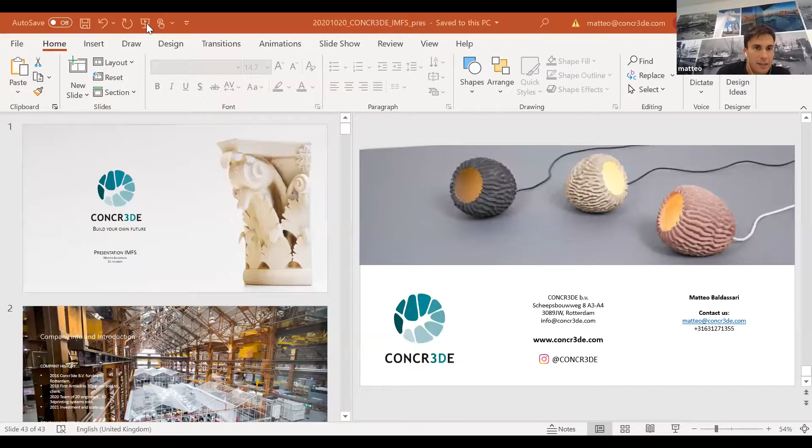CONCR3DE, yes, we are a company that started in 2016. This has been founded by me and my co-founder. Since the beginning, we started developing this technology for construction, so it's in a way related to what we have seen so far. We have always been into this field of additive manufacturing and construction, and that's the reason why we founded the company. It's a bit different from what we had seen so far, so there are a lot of similarities but also different aspects.

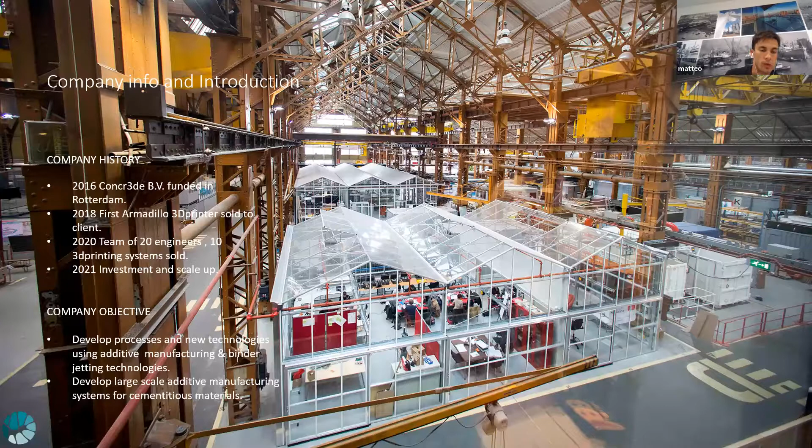The process we use is basically different from extrusion technology. We use powder-based technology and binder jetting specifically. One of the main focuses since the beginning was to basically do large-scale additive manufacturing.

And then in the afternoon, we concluded with CONCR3DE, three technologies based on extrusion, the last one based on powder bed. I believe that they are complementary technologies.

And in whole, we cover several aspects from hardware, robot, Cartesian technology, and other mixed technologies, to software, control and computer-aided manufacturing, monitoring and closed-loop real-time technologies. Also modeling and simulation, that is an important aspect, materials, and several case studies from engineering side to design, arts, and architecture.

So I think it was a very interesting day, and this recording of the video, I think that could be helpful for the future to see again some details and aspects of these technologies.